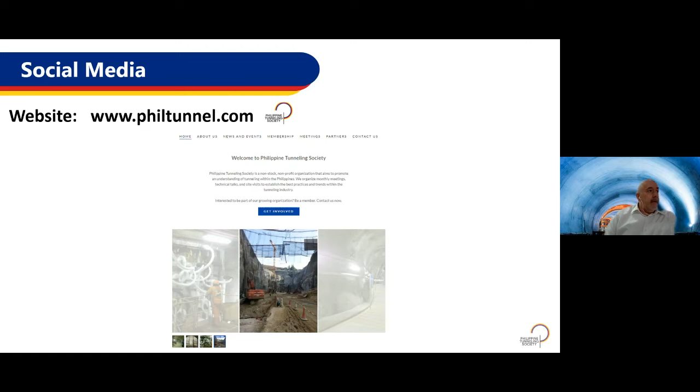I'll quickly run through some background on the Philippine Tunneling Society, for those who aren't so familiar. There's a website you can go to and log in to see some of the information available for the Philippine Tunneling Society meetings and so on, so please go and do that. The contact for that is there as well, through that portal.

As another introduction to the Philippine Tunneling Society, it's a non-stock, non-profit organisation, and the office location is through First Balfour, one of the founding companies for the Tunneling Society. It was formed to promote understanding of tunnelling within the Philippines, and to try to pull together people who are thinking about and interested in tunnelling within the Philippines, to promote best practice, and organise technical talks such as this, and also site visits. Unfortunately, over the past year, because of COVID, we haven't been able to do that, and we want to get back to normal as soon as we can, hopefully with some site visits towards the end of this year.

That's the plan. Just to remind people about the trustees of the organisation: James Rickard is the president, Abigail is the secretary, Malcolm Lorimer is the treasurer, and Thomas and Anthony are also organising various parts of the trustee board, as well as events and so on.

In terms of the programme today, this is a regular meeting, done through Microsoft Teams. We have ACCIONA presenting - Fernando will present on complex tunnels in a dense urban environment. We still have some slots during the year, so the plan is to have a meeting every Friday, or as close to it, at the end of each month.

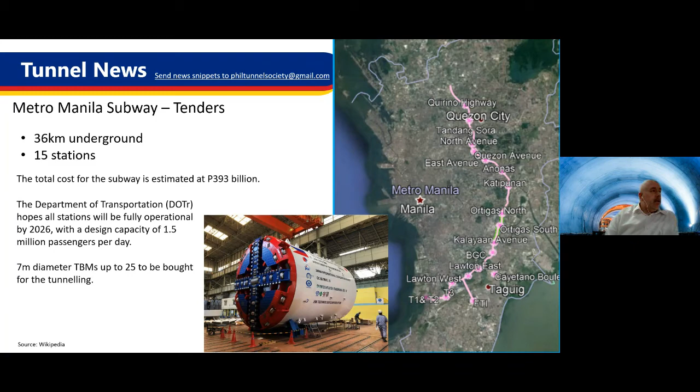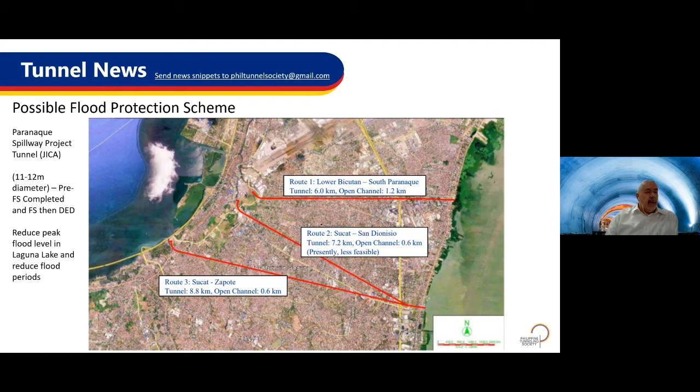Another one on the horizon is the possible flood protection scheme for the Parañaque Spillway. This is a JICA study looking at different potential alignments, which I think will be pushed forward by DPWH. It's interesting in that it could help control flood water in Laguna Lake, reducing the peak and reducing the period for flooding and high water levels.

The Dalton Bypass is another one, up in the Sierra Madre Mountains, giving an alternative routing past the existing road which is frequently blocked by landslides. Various schemes are being looked at. I think this will go into DED soon, JICA funded, but it's interesting that it's still looking at various options of alignment and length of tunnels to provide the final connection. I know the two ends of the road are already under construction, with DPWH upgrading some of the connecting roads to this tunnel area.

Then there's the Davao City Bypass, which will include the longest road tunnel, 2.3 kilometres, as part of the first segment in Davao. This was awarded to Shimizu, Ulticon and Takenaka in October last year. I don't know the exact current status, but it will certainly be the longest road tunnel in the Philippines when built, hopefully within the next 3 or 4 years.

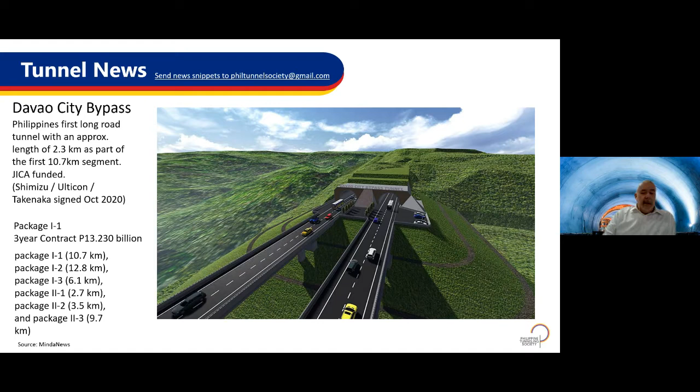Also, there's a small tunnel probably at Wawa Dam in terms of the intake structures. There's a tunneling package being considered for that, covering the outlet tunnel and the intake structure.

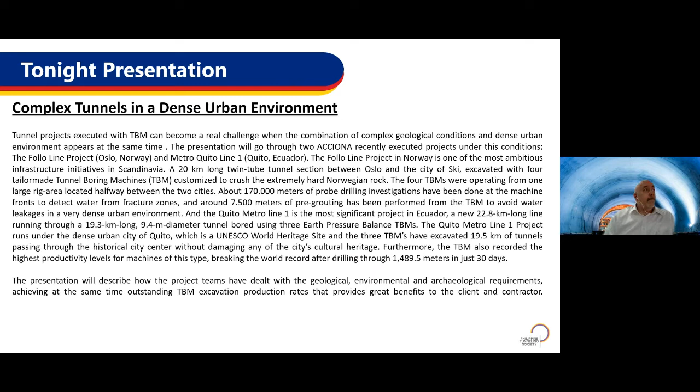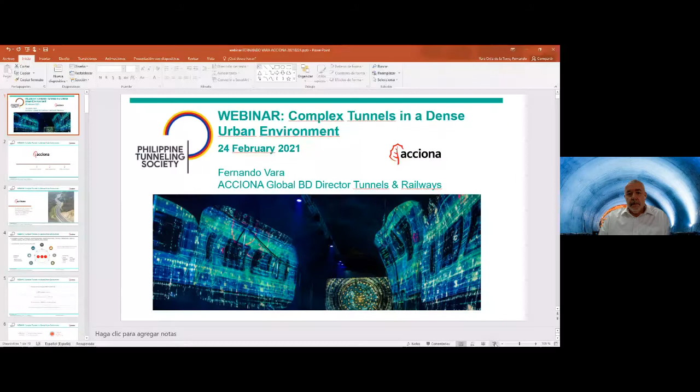Thank you very much. Okay, thank you, Mark, and good morning, everyone. I'm pleased to be here today. I really would like to be in the Philippines as of today to have a one-to-one meeting with all of you, but unfortunately, due to COVID, that's not possible. Hopefully this year we will change this tendency and we will be able to be together. Mark has introduced me, so I think I will go straight to the presentation. Give me just one second. Wait a moment.

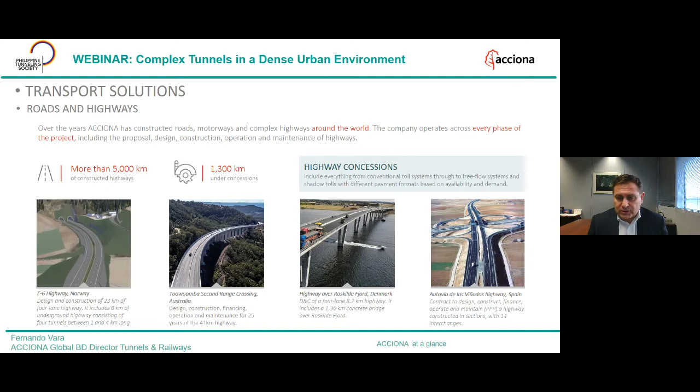So what do we do in ACCIONA? As Mark said, we're a big company, one of the main worldwide contractors, specialized in transport solutions that come from roads and highways. I don't want to extend too much, but you can see some figures around our previous experience: more than 5,000 kilometers of highways, 1,300 kilometers of concessions, which is another part of the company.

Also, more than 85 years of experience in bridges and tunnels. You can see more than 600 bridges of all kinds, and more than 600 kilometers of constructed tunnels. Just to mention, in the last 20 years we've built more than 500 kilometers of tunnels: 300 kilometers executed by tunnel boring machines, 100 by drill and blast, the conventional methodology, and the remaining 100 by cut and cover or road header. So we're covering the whole range of potential tunnel solutions.

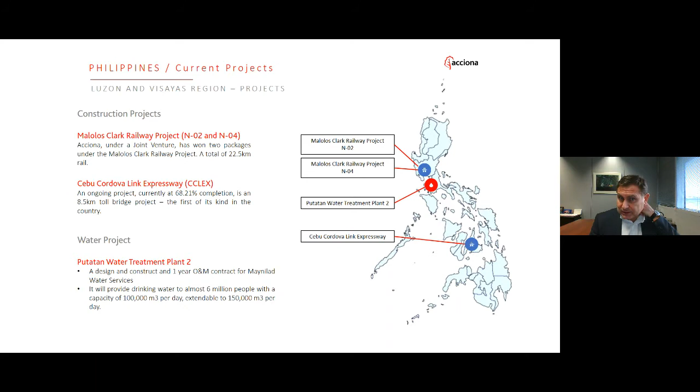Let's talk about the Philippines, because ACCIONA has been really active there in the last 5 years. We started in 2016 with the Putatan water treatment plant, which is now finished. Our main contract, still being developed, is the Cebu-Cordova Link Expressway viaduct, which I'll explain with some figures shortly. We've also recently been awarded two projects, the Malolos-Clark Railway project. So those are our four actual projects currently being executed in the Philippines.

The Putatan water treatment plant was finished in 2019. The Cebu-Cordova project is at about 68% progress; here you can see an actual picture as we're just finishing the main tower of the central part of the bridge. Also, Malolos-Clark Railway, projects 04 and 02, will start soon this year. We're very confident we'll be able to compete for the future tunnel projects coming up in the Philippines.

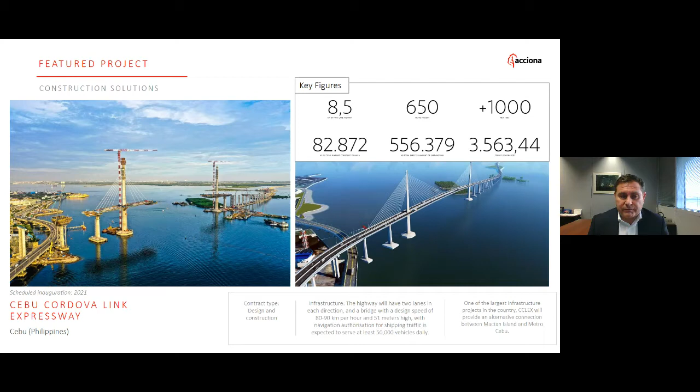The Cebu-Cordova Link Expressway is an amazing and outstanding project — I really invite you to check the website, or if you're in the Cebu area, to have a look, because this will be one of the most impressive infrastructures in the region. Here you can see some figures: around 3,000 tons of steel and a large total amount of expected earthwork. It's a massive project, actually happening, on schedule, and around 70% executed. We're very happy about how this project is performing.

Today I'll talk about tunnels, complex tunnels in dense urban environments, with two projects: the Follo Line project and the Quito Metro. But I'd also like to mention that ACCIONA is really experienced with big diameter tunnels. We have TBMs ranging from 2.4 meters up to our biggest, the Metro M30 TBM, which was 15.2 meters in diameter — the biggest TBM in the world at that time. This TBM is now going to execute a tunnel in Poland; we're refurbishing it, as we have our own in-house capability of refurbishing TBMs, which I'll mention later regarding Quito.

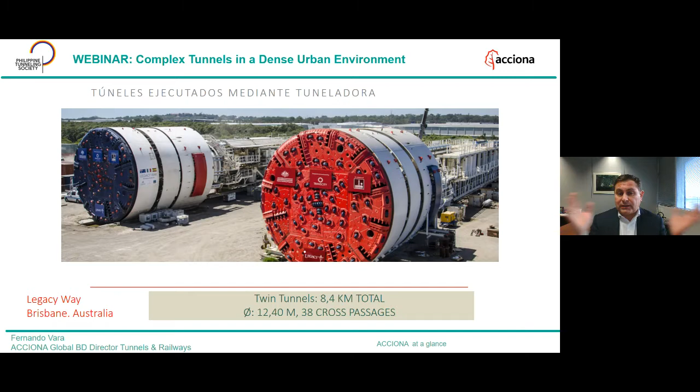There's also the Legacy Way in Australia — I was lucky to be the project director of this project in Brisbane in 2011. These are two twin tunnels of 12.4 meters diameter, using a double shield TBM. So we're used to these big monsters, this kind of TBM, and that's really what the market is now starting to move toward — more and more TBMs above 13 or 14 meters. That's what really counts, because when you do a tunnel, it makes sense to excavate a big section. Okay, so let's go to tunnels and special, real cases.

The Metro Quito is the most important infrastructure project in the country, and probably in South America. Here you can see some data about the client and the project companies. This was a full 100% ACCIONA project. We didn't have any partner. It was fully executed by ACCIONA with the direction of the Consorcio Gerencia Metro Quito, which even had some people previously working in Metro Madrid, so they had a lot of knowledge

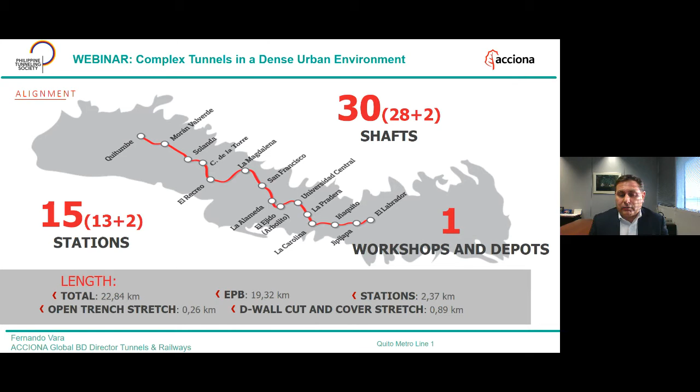and background about complex tunnels, because as you know, Madrid's expansion was very massive during the 1990s and 2000s. So this is the project: more than 23 kilometers of tunnel, and almost 20 of those kilometers were executed by 3 EPB TBMs. More than 30 shafts, 28 plus 2 - the 2 means there were 2 shafts previously done in a previous project. 15 stations, 13 plus 2 - again, 2 stations were executed previously. 1 workshop and depot. The small sections were executed with open trench, diaphragm wall, and cut and cover, but the main part of the tunnel was executed with tunnel boring machines.

So the Quito tunnel is crossing the whole city. Quito is located in what is called the Quito Basin - there is a topographic depression, around 3 to 5 kilometers wide, and it's divided into different sub-basins: the central, north, and south, divided by the Machangara River and El Panecillo Dome.

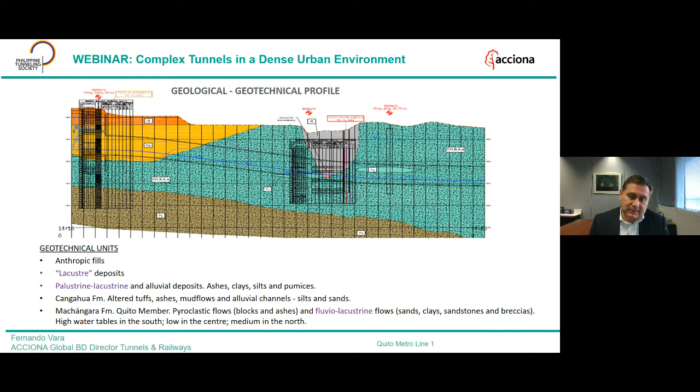So regarding the geology, those are earth pressure balance TBMs. You're dealing with complex ground with presence of water. That's why this was the selected tunnel type for the excavation. As you can see, mainly the materials are alluvial deposits, clays, silts, and sandstone, with water presence. So it was absolutely needed to have a machine able to control the water entrance and the stability of the front of the tunnel.

So here you can see at a glance what the project and execution were. There were 3 TBMs excavating the tunnels from one side to the other. The first TBM started at the Fondo de Saco and did the final breakthrough at El Arbolito. It executed around 7.7 kilometers, and it had 7 what we call arrastres - that is, when you arrive at the station, it's just pushing the TBM through the station. It was not a real excavation, it was just the tunnel itself.

It's worth mentioning that the TBMs themselves were not massive, but they were big - 9.4 meters was the excavation diameter. We have precast concrete lining, 6+1 segments, with an inner diameter of 8.4 meters. And as is very usual in the world, the filling of the gap was done with bi-component grouting - the two components that are activated in the TBM at the same time, making a foam that fills very well the gap of the over-excavation with the outer diameter of the segment.

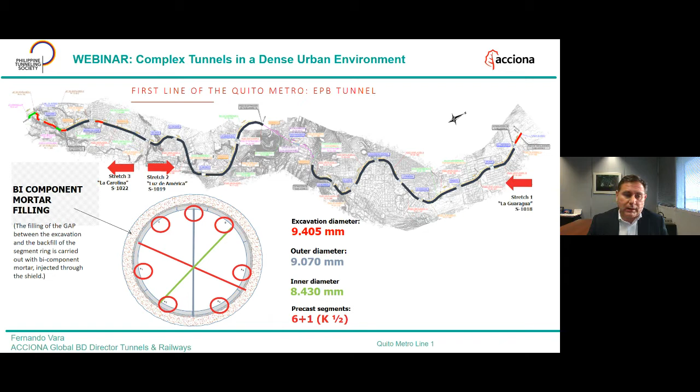Here you can see the three TBMs: La Guaragua, Luz de América, and La Carolina. I think I mentioned that our ACCIONA capability in terms of TBM comes from 1973, when our first TBM, our Robbins TBM, was procured from the company. We have more than 50 years of experience on tunnel boring machines. We have our own workshops, and what we call the SPO, the Self-Performance Office, is responsible for doing maintenance and refurbishment on any TBM the company has. We have around 5 TBMs owned by the company.

In this case, the third TBM previously worked in Metro Madrid. It was called Chotis, TBM number S295 - that number refers to the numbering of TBMs fabricated by Herrenknecht. In recent days, this TBM became the S1022, so there were almost 800 TBMs built before this one. But that doesn't mean this TBM was not fit for purpose, and I will even show impressive figures about this TBM.

So it was fully refurbished in Madrid, in Toledo, close to Madrid, in our workshops. It was commissioned and transferred by boat to Ecuador, and it performed as well as the two other TBMs that were brand new.

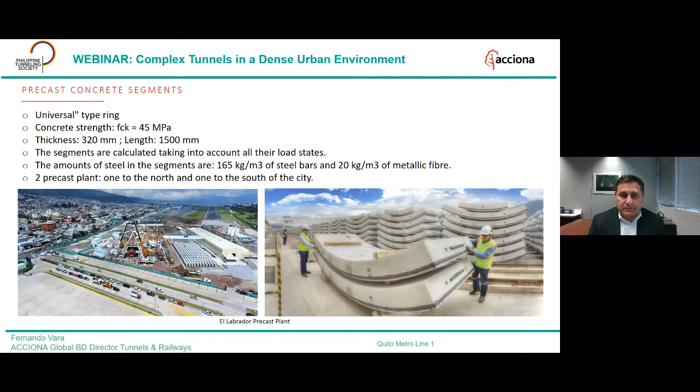But as soon as the station was finished, we recovered the same productivity.

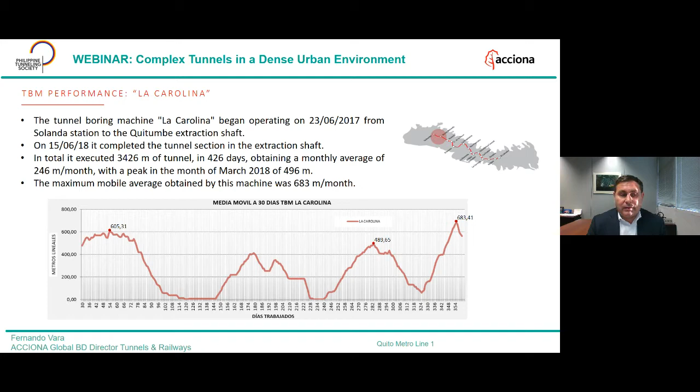We were very satisfied, and the client was really impressed by our performance, because the quicker the TBM, the less settlement on the surface, the cheaper everything is, and the less potential risk of accidents. The quicker and best way to do a tunnel means no settlement on the surface and everything controlled.

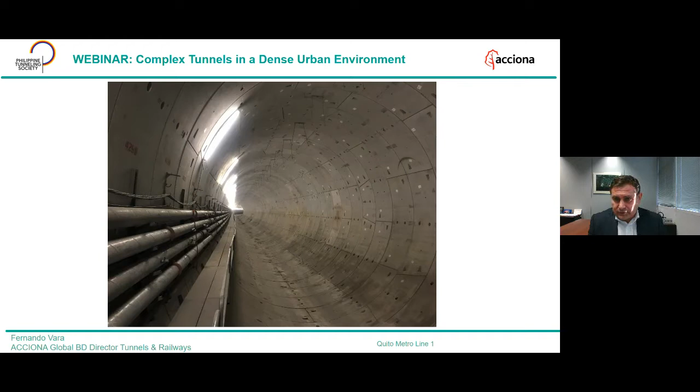Here you can see some pictures of the project: the tunnel configuration, with very good quality of segment alignment and construction. There are no gaps, and a very nice dry tunnel. This is the final picture of the tunnel with the two parallel tracks installed.

Also worth mentioning, this is a dense urban environment—we were crossing the city of Quito, one of the most dense South American cities, with historical buildings. Here you can see the cathedral in Plaza San Francisco, where we needed to build one of the stations.

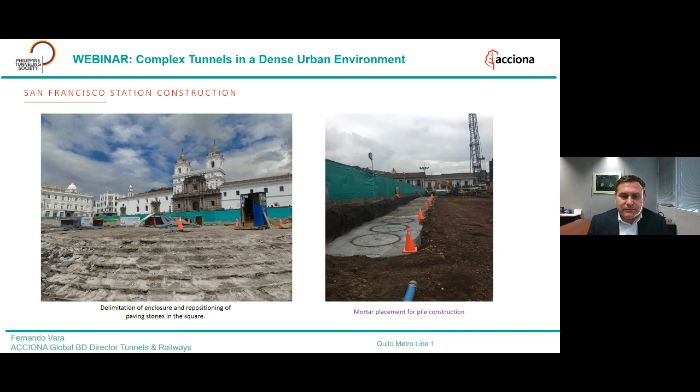This was a massive exercise just to take out, one by one, each of the paving stones, as you can see in the left-hand picture. Each stone was marked with a number, and we needed to take them all out and put them back again. It was a massive operation from an archaeological perspective.

The final configuration of the San Francisco square was amazing. A lot of people were happy about the final shape, with the new station integrated into this complex environment.

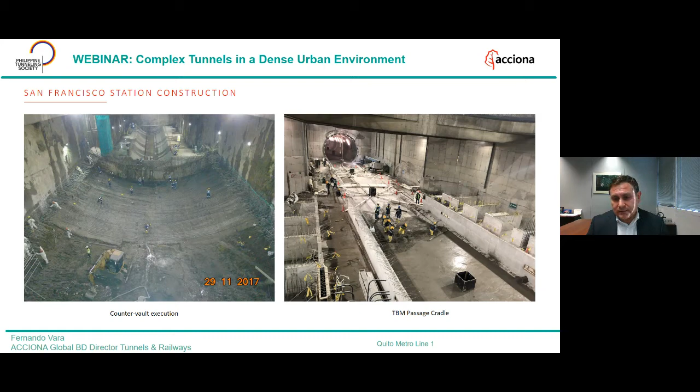Here you can see some pictures of the tunnel and station construction, with a massive lower slab level for the TBM to pass through, and some works on the TVM passage cradle as the TBM was crossing after the breakthrough.

And here are the final pictures of some of the stations, very nice and modern. Worth mentioning, this is the first metro ever in Quito, so the government and the client are doing some kind of training for people to understand what a metro is, because they are scared of going underground.

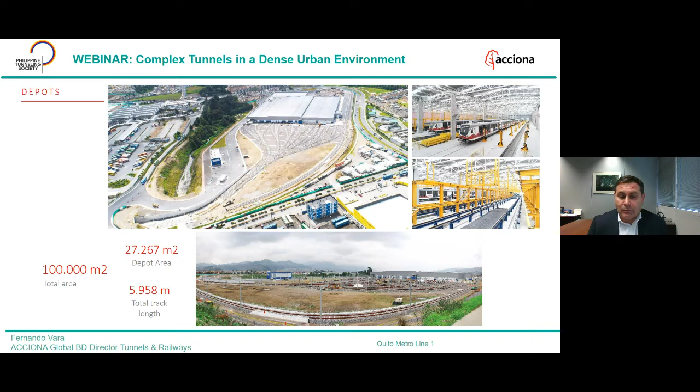This gives you a sense of how a project like this can change the configuration of the city and the population's perception of infrastructure. Also worth mentioning, there was track work and a big depot for all the trains, with almost 6,000 meters of total track length installed by ACCIONA.

Finally, to mention some social impact due to the nature of this project. As I said, it was the first metro in Quito. The project contributes around 1 billion euros to the GDP of Ecuador, and more than 42% of the measures contribute to the Sustainable Development Goals.

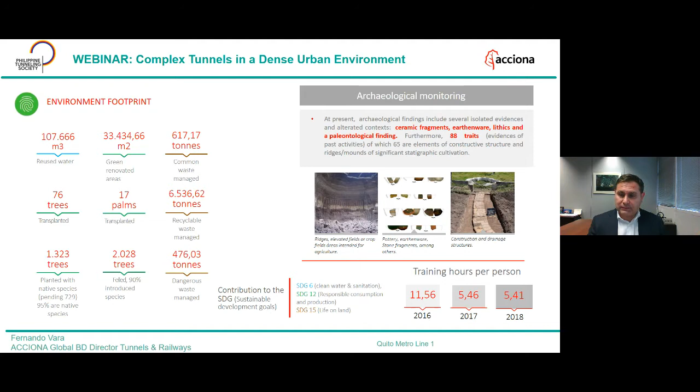We're very satisfied about these figures, but also about the environment and archaeological monitoring. Here you can see the figures about how many trees were transplanted, the reused water, the planting with native species, and also the archaeological monitoring, which is very important since this is a very important city in terms of archaeology, and we were very conscious about that. There was no impact in terms of project delay due to any findings, while at the same time maintaining all the archaeological history of the city.

So I will share with you a video of the project.

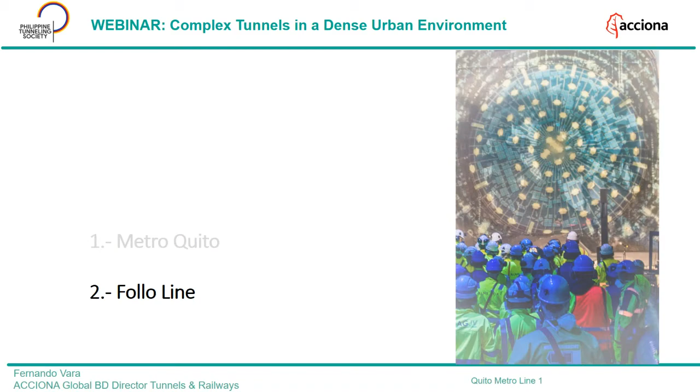As you can see, a lot of breakthroughs and a lot of very nice video shots about how complex the tunnel was in a dense urban environment.

So the second project, the Follo Line project, is one of the projects I was lucky to be the project director for. It's one of my kids, so to speak. I have spent more than 5 years in Norway on this project.

First, to understand where the Follo Line project is: it's in Oslo. Oslo is the capital of Norway, in the north of Europe. It's a very northern country, so it's very cold, and as I will mention, there will be a lot of challenges.

It's a 20-kilometer twin tunnel that will connect the main city, Oslo the capital, with Ski, a population to the south. This will be the natural way of developing the new high-speed trains to the south and connecting to Sweden.

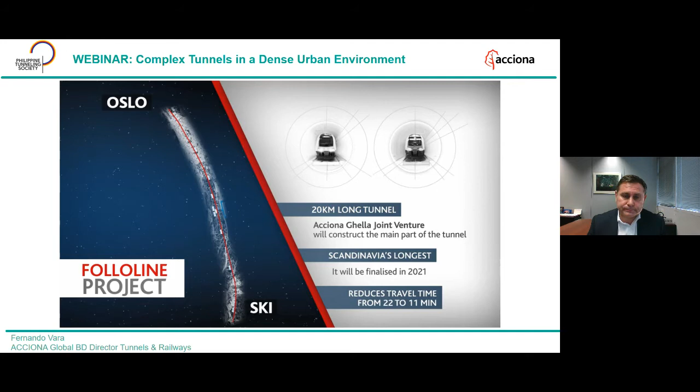There were 4 projects. The first one, and the main one, was our EPC, number 3. There were the main tunnels, and other smaller connections: one with the station, another with Ski, and drill and blast works in the north.

It was our first project in Norway. We understood clearly that we needed some local flavor, so one of the key Norwegian companies was working with us.

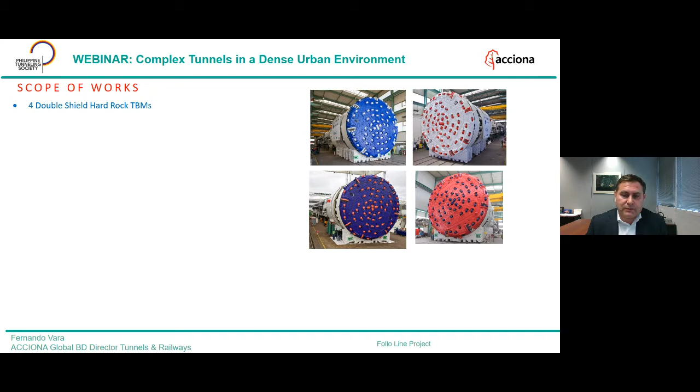More than 37,000 meters of tunnels, with a complex configuration where the 4 TBMs started from the same location at a central point, 2 heading south and 2 heading north. This created a complex logistics configuration for the installations, which I will go through now.

40 cross passages. It was not only TBM work; you need to connect the 2 tunnels with natural drill and blasting, and here you can see some pictures of that work.

9 million tons of rock — a lot of material. We were lucky because the client had prepared an area close to the site where we could transport all the material via conveyor belts from the TBM to the site, with no transport outside the facility. This was very good from a sustainability perspective, and we were able to manage it well.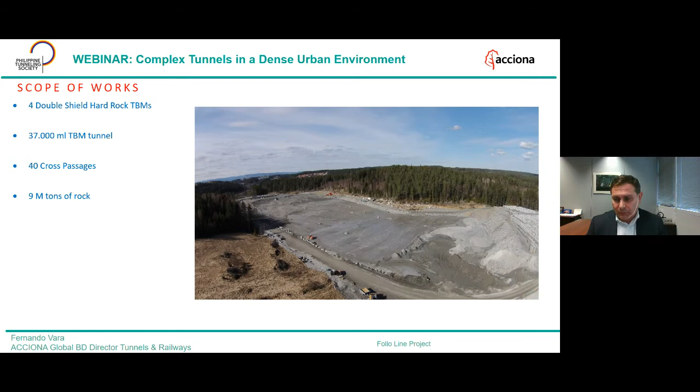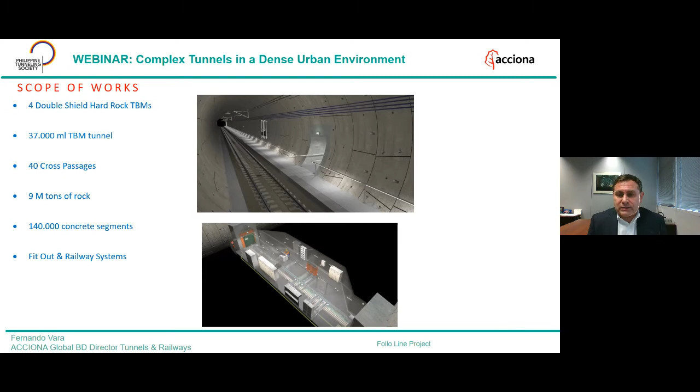More than 140,000 concrete segments were produced. This involved one of the biggest precast factories ever in the world — we had 3 precast factories operating at the same time. But this was not only a tunnel project; you also need to do the fit-out and the railway systems. It was a turnkey project, and we are now finishing the railway works and starting with the railway system works.

With a project of this scale, you can see that plenty of people were needed - more than 1,200 workers at the peak, with more than 25 nationalities. So language was a challenge, but we were able to integrate the full team with a good multicultural workshop policy so that everybody understood each other well.

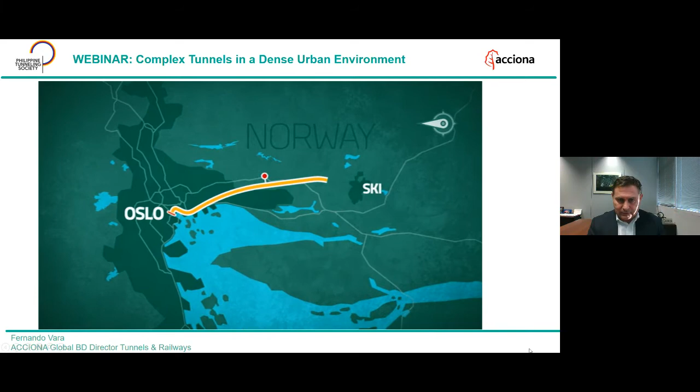I'll share what we thought about when we were tendering the project. This is the presentation we did for the client during the tender phase, showing how we were thinking about developing the full area, because the complexity, as I said, is having 4 TBMs in the same location. So we planned to have 3 different platforms at 3 different levels. Platform 1 was related to the TBM activities, the conveyor belt, and the works of the cooling plants.

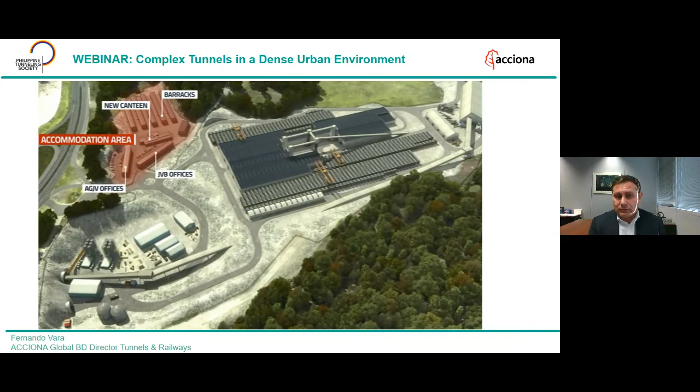The second platform was about accommodation, the offices, and the canteen area for the workers living in the camp site. The third platform was about the precast factory, the segments, the crushing and spoil material area, managing the spoil and the aggregation.

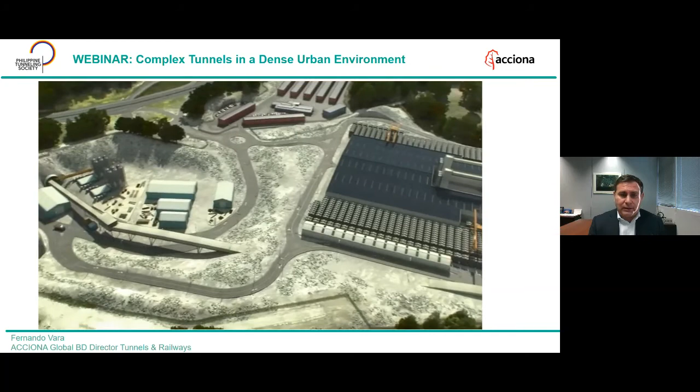It was fully integrated into an area that is a very nice forest. Norway is a very green country, and it was a challenge because there are neighbors around, and we needed to work 24/7 with minus 20 degrees Celsius in winter - day and night, with no dust and no noise impact on neighbors. So you need to think about how to integrate all these activities in a way that there's no conflict with the neighbors or any interaction affecting productivity.

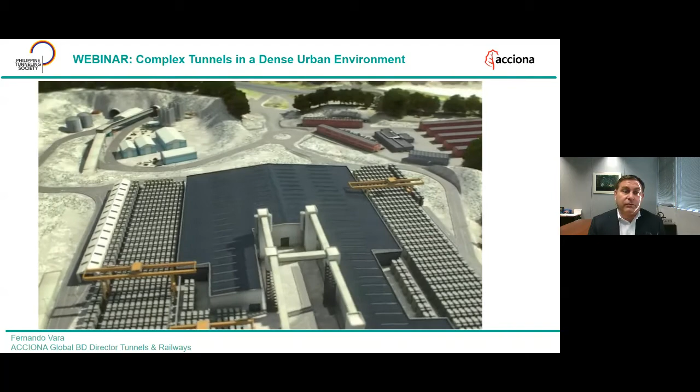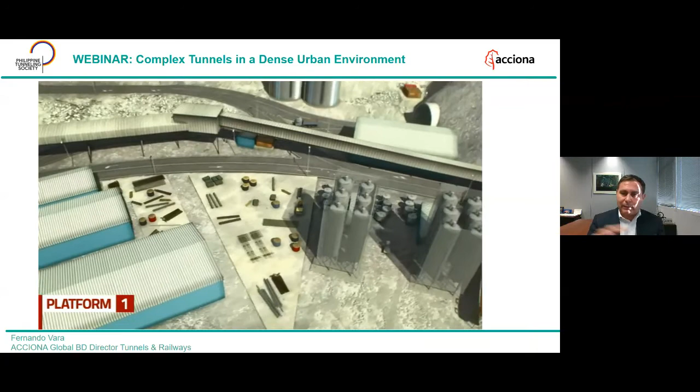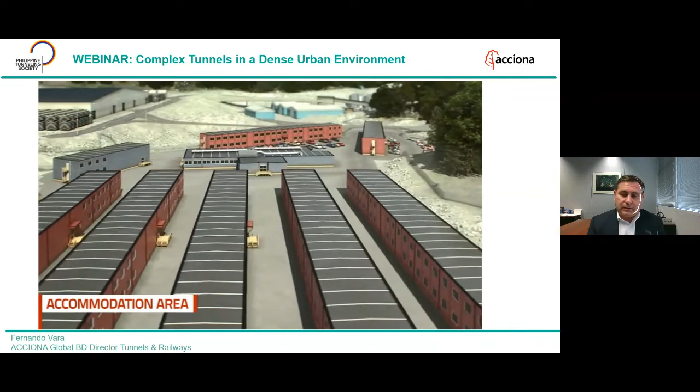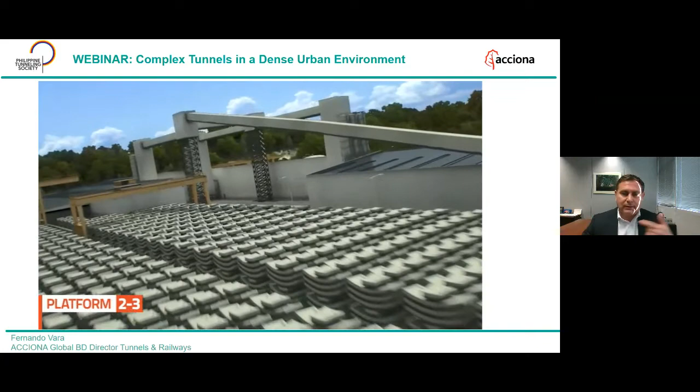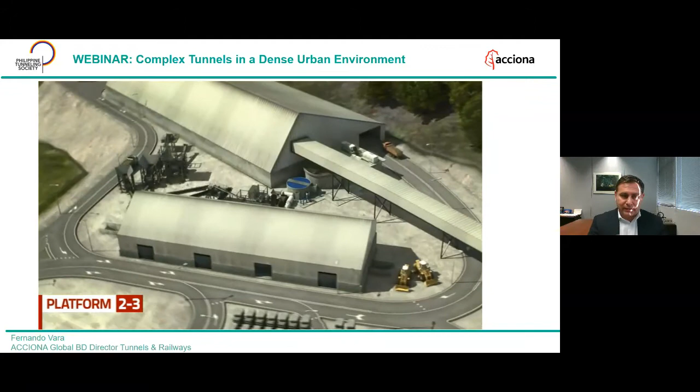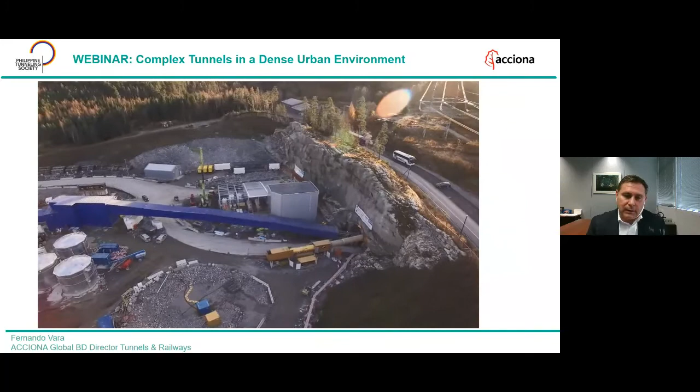So this is the reality - this is the tunnel platform 1 section. You can see the blue areas, the offices, and the red ones for our facilities, the client's, and the canteen.

By far the best Italian and Spanish restaurant ever in Norway - people were very satisfied with the food. We've been here for 2 years in excavation.

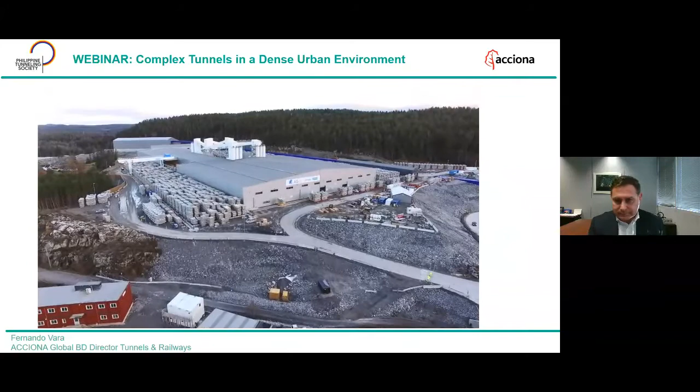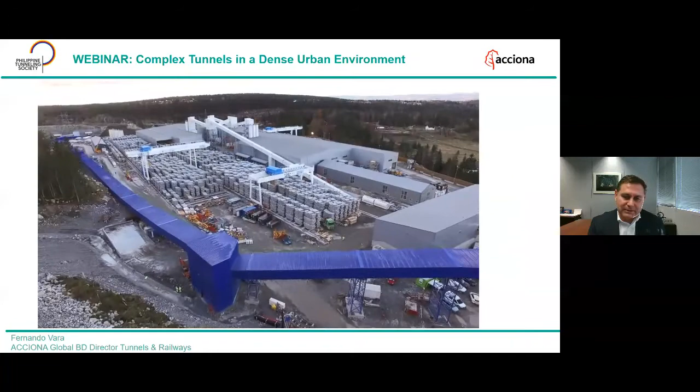The 3 precast factories, all in the same place, with gantry cranes, and the 3 concrete batching plants integrated and covered, protected for winter and protected against noise and dust. This is the massive spoil shed - one of the biggest ever covered spoil sheds in Norway. It was used for taking and then loading material.

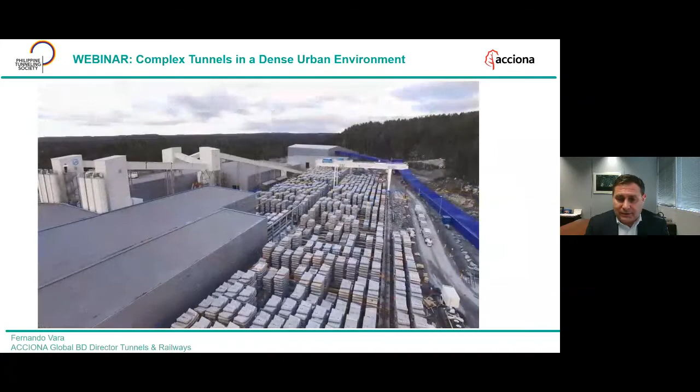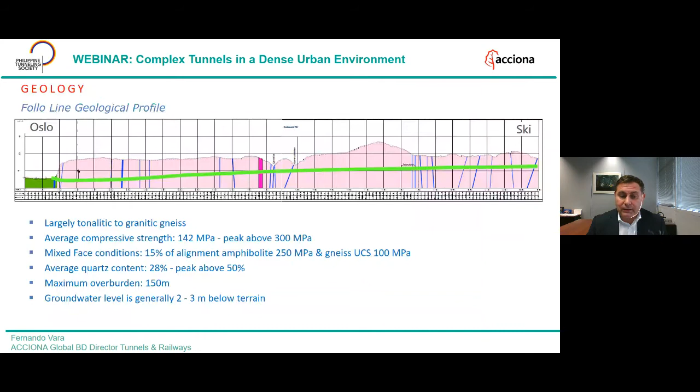Segment design was very standard, like the other one - universal ring, 6+1, more than 500,000 cubic meters of concrete. The excavation diameter was 9.96, so the ring outer diameter was 9.55. The multi-service vehicles were standard transport vehicles, but in this case we had just 2 rings per load, which is more than 125 tons - that's massive.

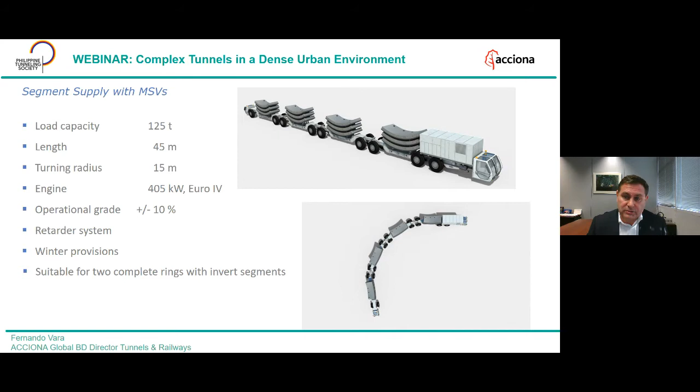Also the radius, because I'll explain now, the configuration of the tunnel was very complex. Ventilation - it wasn't just 4 tunnels, there were a lot of drill and blast tunnels connecting each of the caverns, arriving at the area where the assembly caverns were. So the ventilation design was also very complex, needing to account for any potential fire at all times.

The conveyor belts - the 4 conveyor belts from the 4 tunnels were merged into just 1 conveyor belt that brought all the material to the surface, to the big shed I explained before.

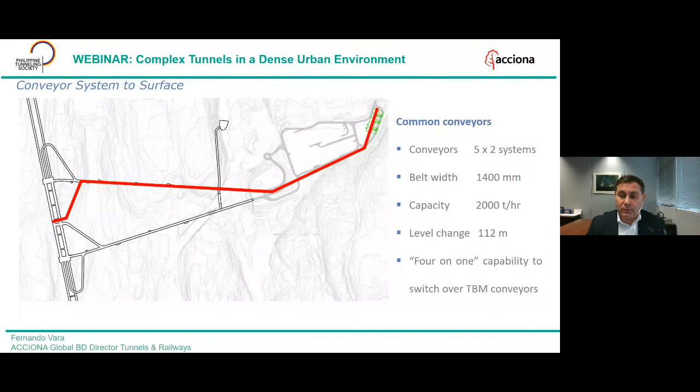Belts with capacity of 2,000 tons an hour, with double capacity. If one was not working, we have a double system in case. Configuration of the tunnel, smaller conveyor belt, 150 tons an hour, but this is a very standard configuration. So the complexity is the logistics.

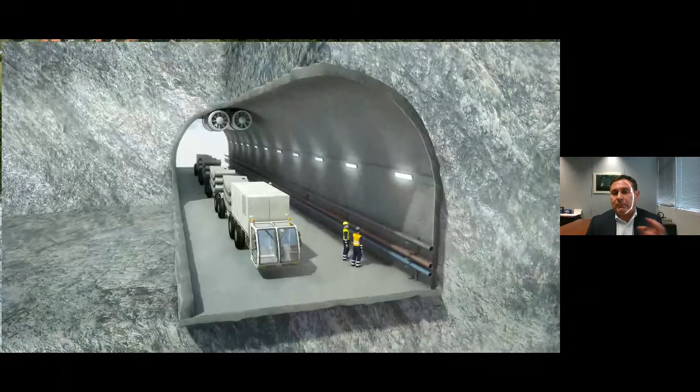You can see here how many pipes were at that time, the complexity of the space with the 4 conveyor belts coming, and the ventilation for the area. Then each of the MSVs were going to one or the other tunnel to deliver the segments.

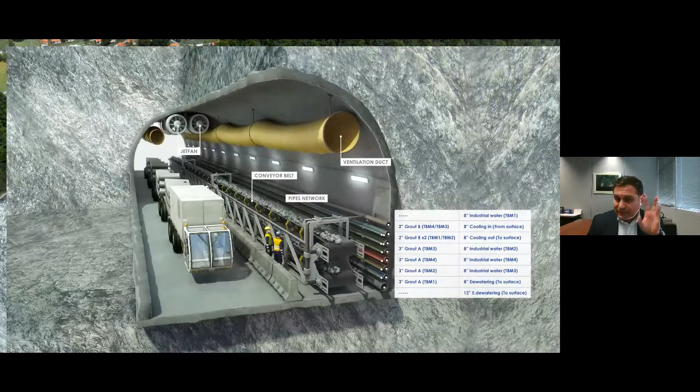But as you can see, we have the 4 tunnels' conveyor belts merged into just 2 double decks with a massive amount of pipes. So it was very narrow. From the logistical perspective, it was a very complex tunnel.

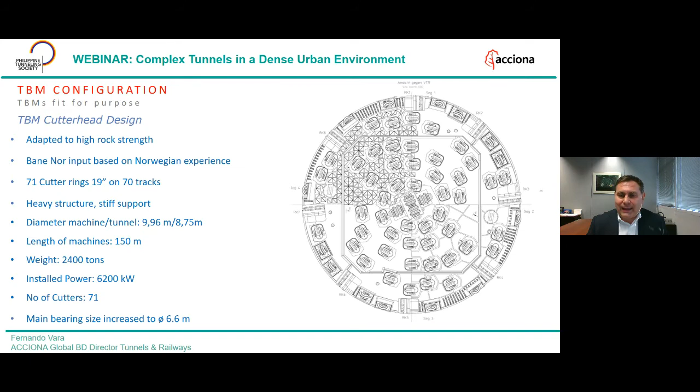The TBMs, 4 Herrenknecht TBMs. Here you can see the most important thing is the cutter head design and the weight. This is the heaviest TBM I have ever dealt with, 2,400 tons of TBM, more than 70 cutter rings, 19 inches. And the main bearing, we also increased the size from 6 to 6.6 meters to give real heavy strength to deal with the Norwegian hard rock.

Important to mention that this is a tunnel with a lot of grouting, and we're in a dense urban environment. The grouting means you need to do injections ahead of the TBMs to try to avoid water leakages into the tunnel. So from the TBMs, we performed 8 kilometers of pre-grouting. This was never done before from a TBM, and at the same time we achieved the production as expected, because when you do these operations from rig drills, it takes a lot of time.

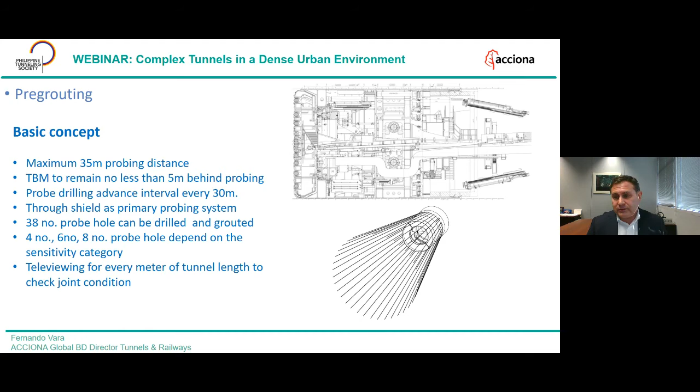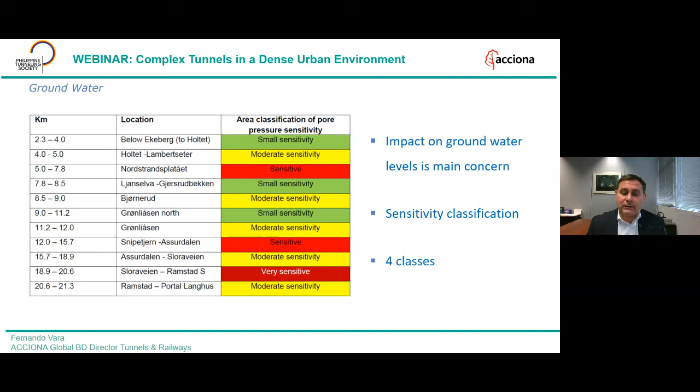On top of the normal geology configuration, there were a lot of vertical weakness zones, which were the potential risk areas for water ingress. That's where the client specified different areas with different water ingress sensitivity, from small to high sensitivity, where we were mandatory to do pre-grouting in the sensitive and very sensitive zones, but in the small sensitive zones it depended on the core drills we were doing every morning.

We were doing a 35-meter probe to check the water ingress. Depending on the liters per minute of water, related to the different scales, we needed to do pre-grouting. Then we needed to stop the TBM works and do a full round of grouting. That was executed with these 2 drill equipment.

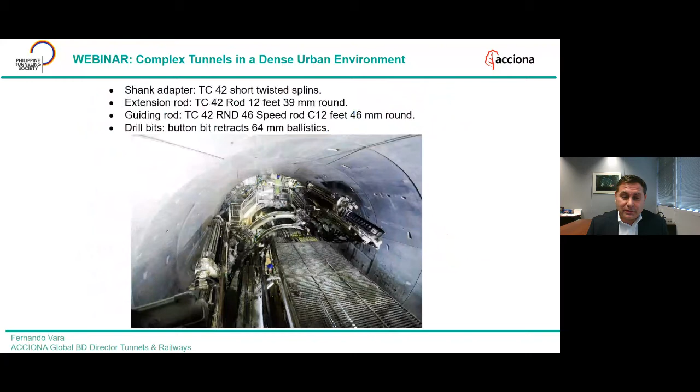Here you can see this is the kind of equipment that you take out from the TBM on day one, because you never use it. In this TBM it was the opposite — we were fully working with these 2 drill rigs, very well prepared, and we even needed to improve the performance due to the complexity of these works, because a lot of pre-grouting was needed.

So here you can see there were 38 drill shield positions. The drill rigs were doing 40 drills to perform the grouting ahead of the TBM. Grouting was very important, but also the complexity of the work was due to the fact that we had 4 TBMs in the same location. And this is a video that shows how complex the assembly of the TBMs was.

After the TBM were tested in Germany, it was transported from Germany to Norway by boat and by truck. But the complexity was to assemble 2 TBMs at the same time in a cavern that you can see, 30 times 50 meters. Massive caverns, but also very complex logistic work, because 2 TBMs at the same time, you can see the cutter heads, the 2 shields at the same time, and the same in the southern cavern. So the complexity of the work did not stop us, and we were able to perform the assembly and have the excavation completed.

And this was, of course, the biggest thing I have ever done in my career, to do 4 TBMs assembled at the same time in a cavern.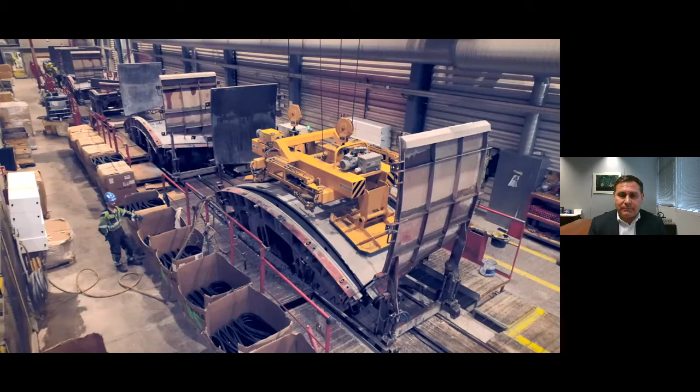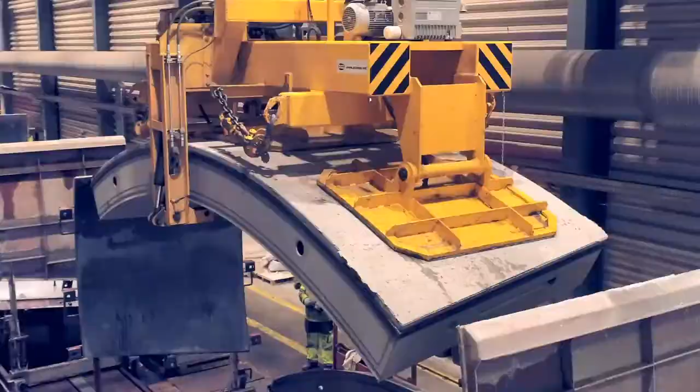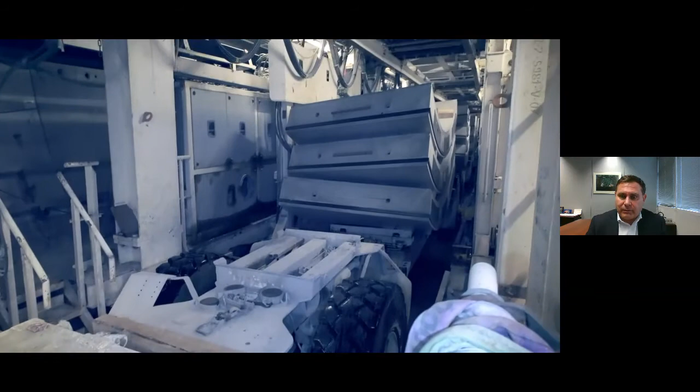The MSV arriving to fill the TBM. The segments are then installed and then transferred to the front of the TBM. And as you can see, it's a very narrow operation, but then an automatic hydraulic system lifts up the segments. The MSV leaves the TBM, goes back to get another segment, and then each of the segments is transported to the front part of the TBM. This is where the shield is, the metallic section of the TBM, for the workers doing the segment assembly. Each segment is installed, and with 7 segments we build a ring.

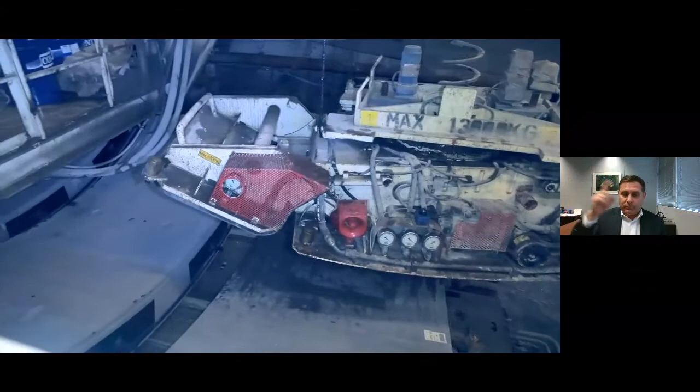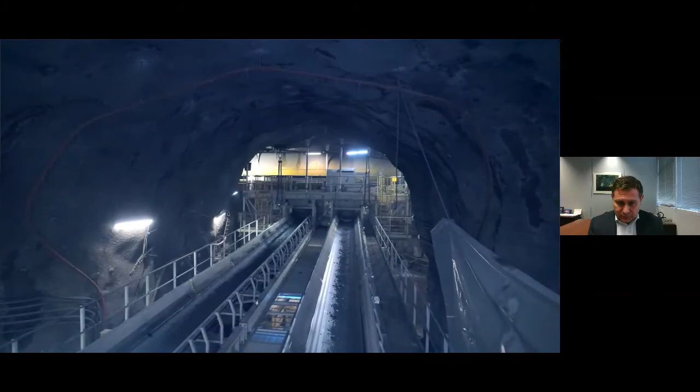Every ring is a normal operation. Also, the material comes from the tunnel via the conveyor belts. Massive conveyor belt system, more than 80 kilometers of conveyor belts in the tunnels. All the material comes to the same location, merged into one conveyor belt system. It's the complexity of the conveyors. All the conveyor belts bring the material to the surface, and again on the surface we take the material to the spoil area. So a very sustainable area, working 24/7.

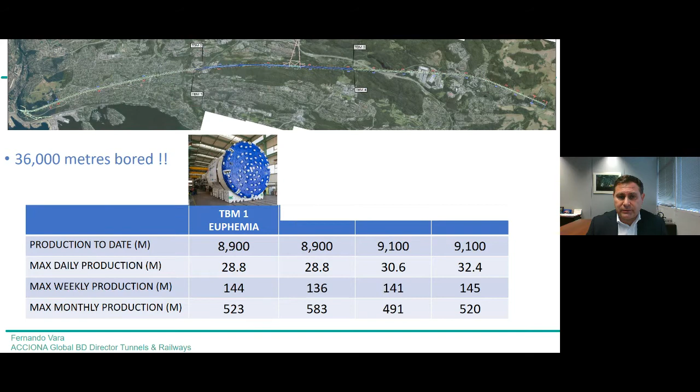And this is the TBM production. Not as impressive as the Quito ones, but as you can see, the 4 TBMs were able to do the same performance. That shows it's not about the TBM, it's about the crew. We have the same good crew with the same TBMs able to do the same. Around maximum 500 meters a month and 30 meters a day.

But importantly, this is also doing pre-grouting at the same time, more than 8 kilometers of the 36 kilometers. So the important thing is that you are able to do pre-grouting during the TBM operations with no effect on the daily activities.

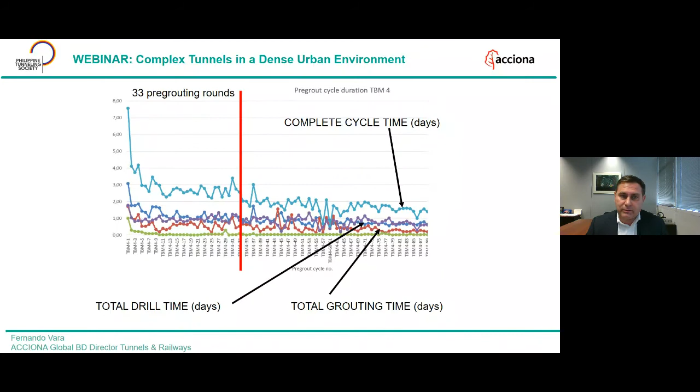And this is the way to show it. This was the first 33 pre-grouting rounds. We were not able to do a grouting round in less than 3-4 days, and we realized it was really having a massive impact. Then much more pre-grouting was expected, and we realized we needed to improve the system. But at the end, after around 100 rounds, we were able to do everything in less than 1 day, 1 to 2 days. That's when we achieved the real TBM production with pre-grouting executed from the TBM with no effect.

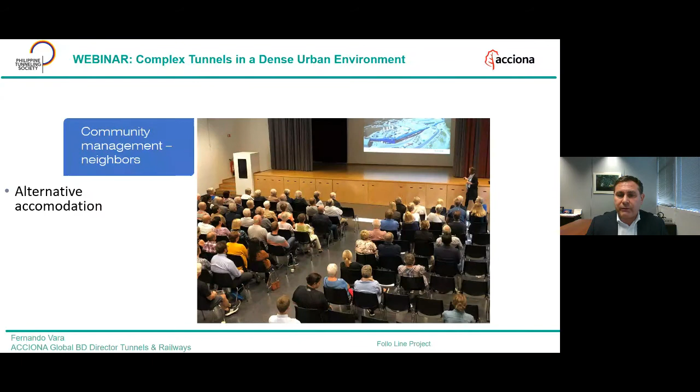Finally, just to finalize, dense urban environment. Here you can see how dense Oslo is in the last section of the tunnel. So it was important to have community management. We had a very extensive campaign about taking care of the neighbors, offering alternative accommodation, and giving the right information to the people about the project, because as you can see, the neighbors don't want to have problems. The best way to show we were doing a good job was the survey the client did.

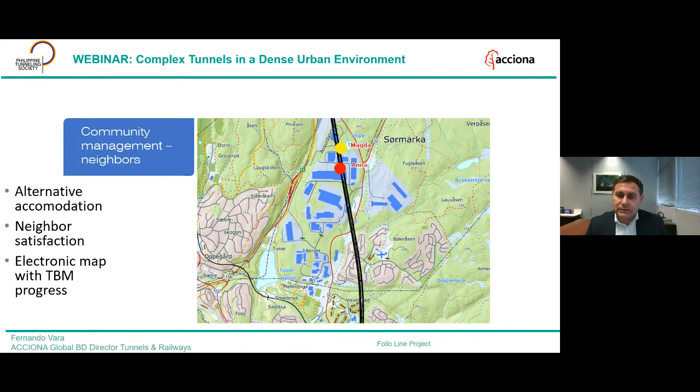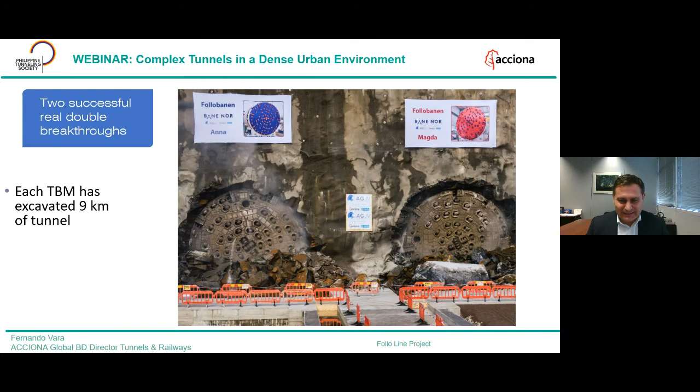So finally, the breakthroughs. There are only 2 very happy days in a project: when you sign the contract, and when you do the breakthrough. And we have 2 double breakthroughs. That is not very usual, because normally you have one TBM and then the other one. I will show you a video of this magic moment of the 2 breakthroughs, in September 2018 and February 2019.

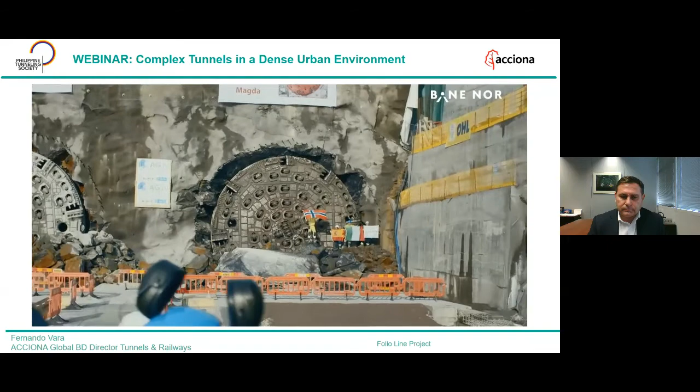And that's it. That's my presentation. Thank you for your attention.